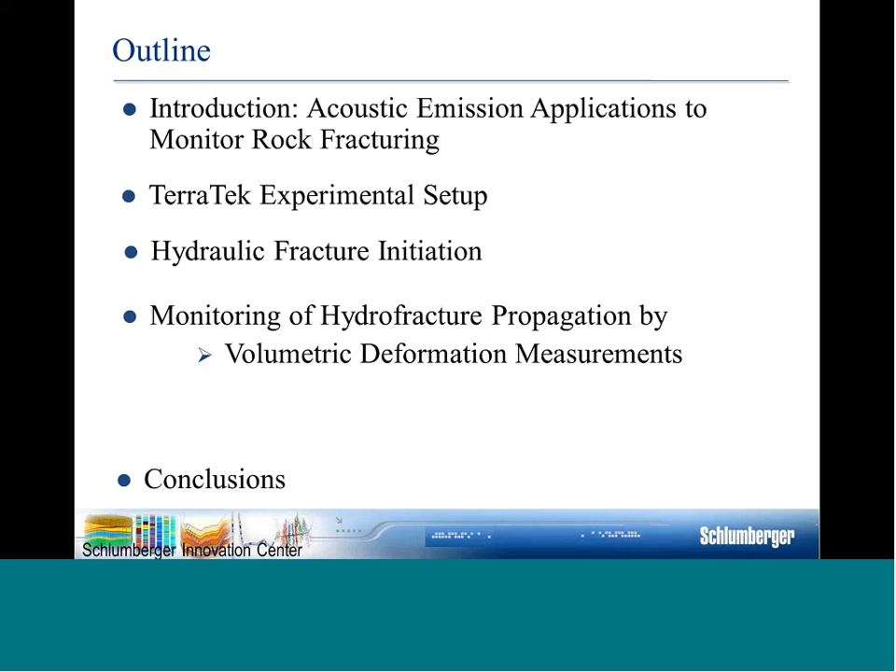As John already mentioned, you can probably guess from my accent that originally I'm from Russia. For more than 20 years I worked at the Academy of Science of Russia in the Laboratory of Physics of Fracture. I got my PhD diploma in Russia, but after the collapse of the Soviet Union, I moved to the U.S. Geological Survey, where I worked about 5 years. Then I was invited to work in Germany, at the German Research Center, where I had a permanent position with everything set up for pure scientific research, until 3 years ago, when Roberto Suarez Rivera and Sidney Green convinced me to change my pure academic research for the challenging research at TerraTek, Schlumberger. I relocated to Utah about 3 years ago.

Throughout my whole career I always used acoustic emission. As John mentioned, for more than 35 years I've used acoustic emission to register cracking at different scales, starting from micro scale cracking of grains, up to studying the preparation of earthquakes in the deepest underground gold mines in South Africa. In all this research I always use the acoustic emission technique to register cracking, because it's a really powerful tool to investigate what is going on inside a stressed body.

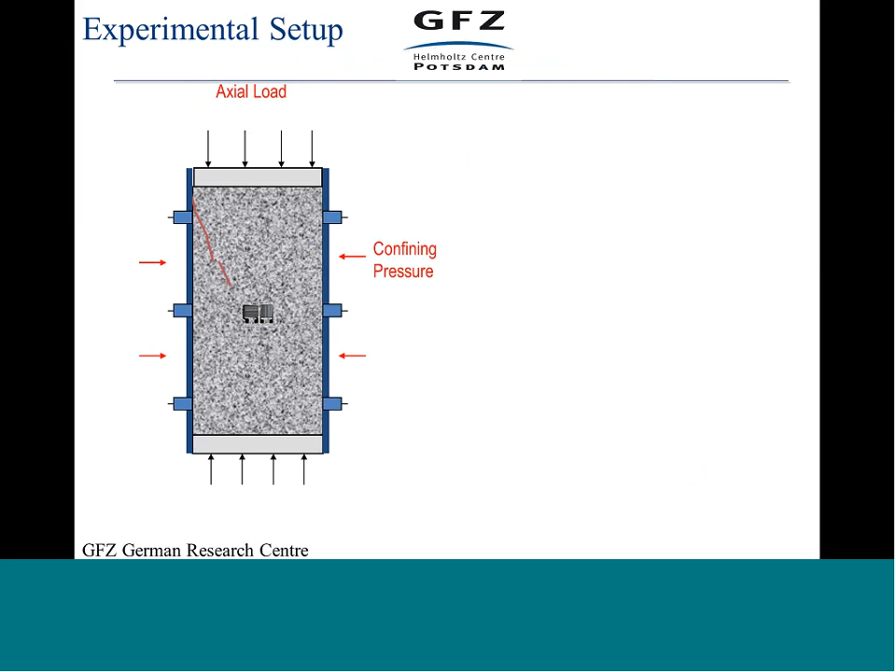Today I will show you an overview of acoustic emission applications. First I'm going to start with the application of acoustic emission for researching fracturing of rock that I performed in Germany. I'd like to mention this setup because now, together with my colleague Eric Edelman, we started very similar research at TerraTek. In Germany, I investigated cylindrical samples of 50 millimeters diameter.

During fracturing of the rock, acoustic emission sensors register elastic waves, and using these elastic waves we triangulate and localize cracking. But for accurate localization, it's necessary to know the velocity in the rock as precisely as possible. Therefore we use a set of sensors for periodically sending pulses through the rock, to measure time-dependent and stress-dependent elastic velocity during the process of fracture.

As a result of this precise velocity measurement, it was possible in my research in Germany to achieve accuracy of acoustic emission hypocenter localization of about plus or minus 2 millimeters.

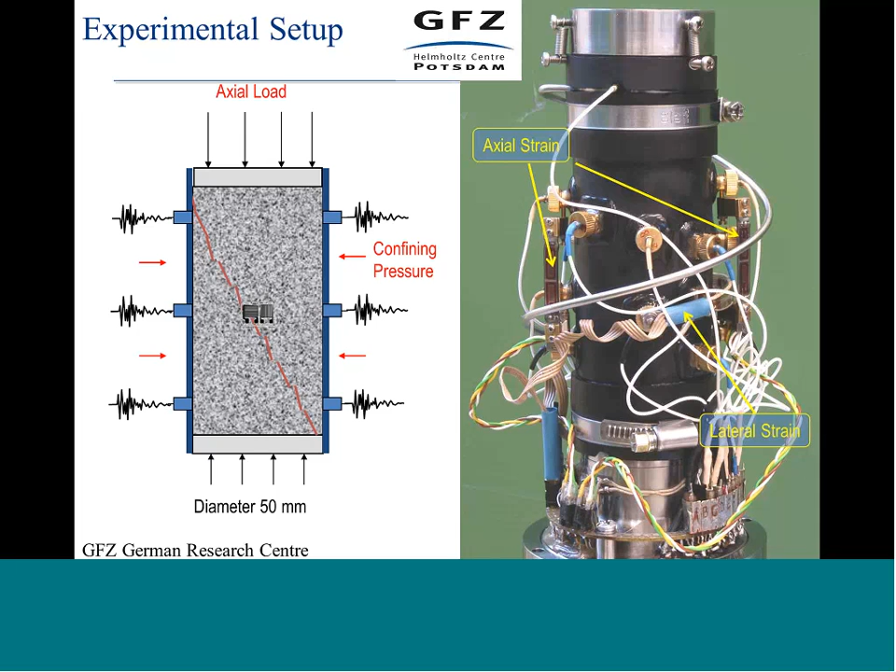The next slide shows our technique for separation of acoustic emission events.

This technique is really very simple. Right now at TerraTek, we initiated work using full moment tensor analysis for more detailed analysis of the source function. But I will show you that even this simplified technique can give us some information about the type of cracking we register during the process of fracture.

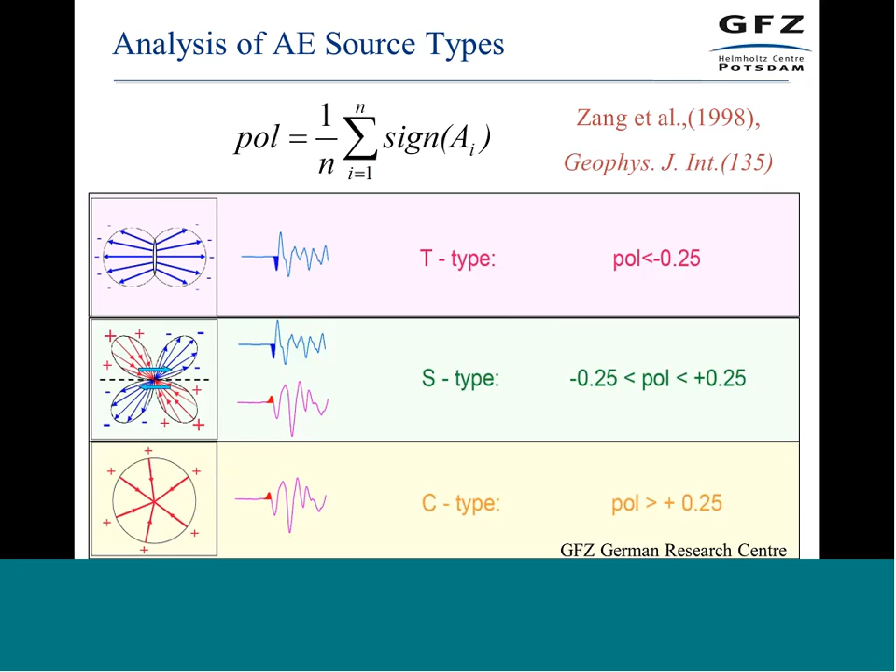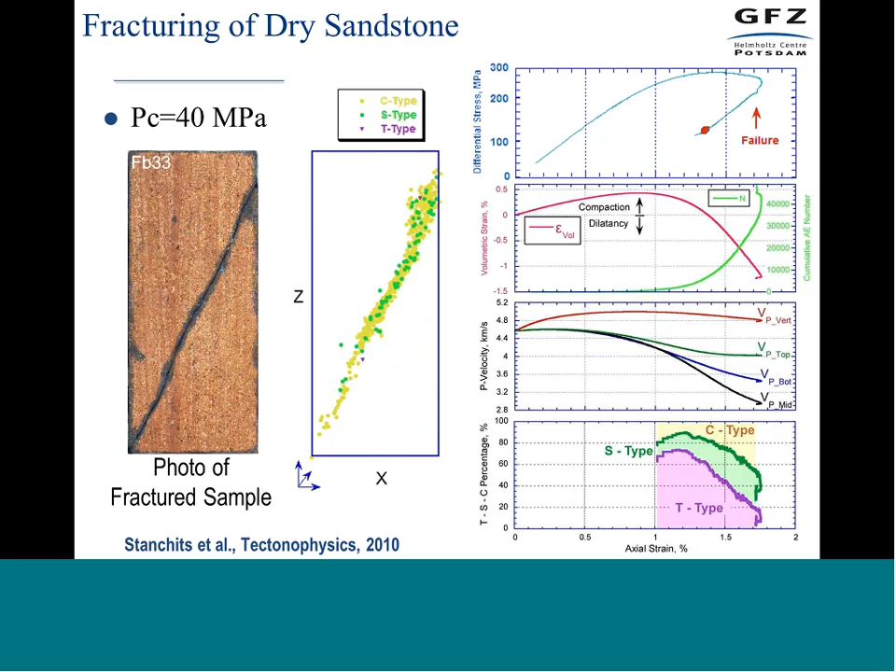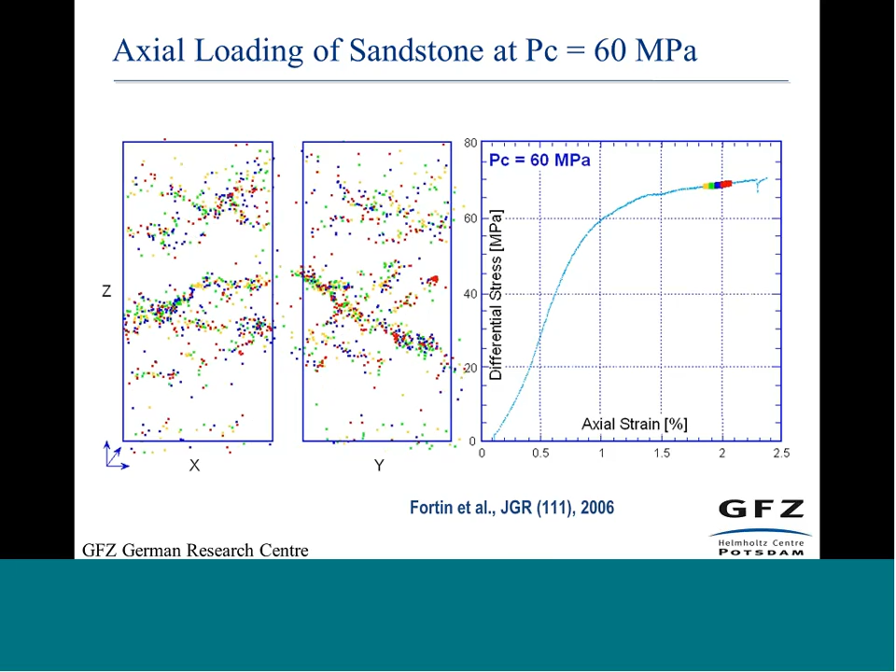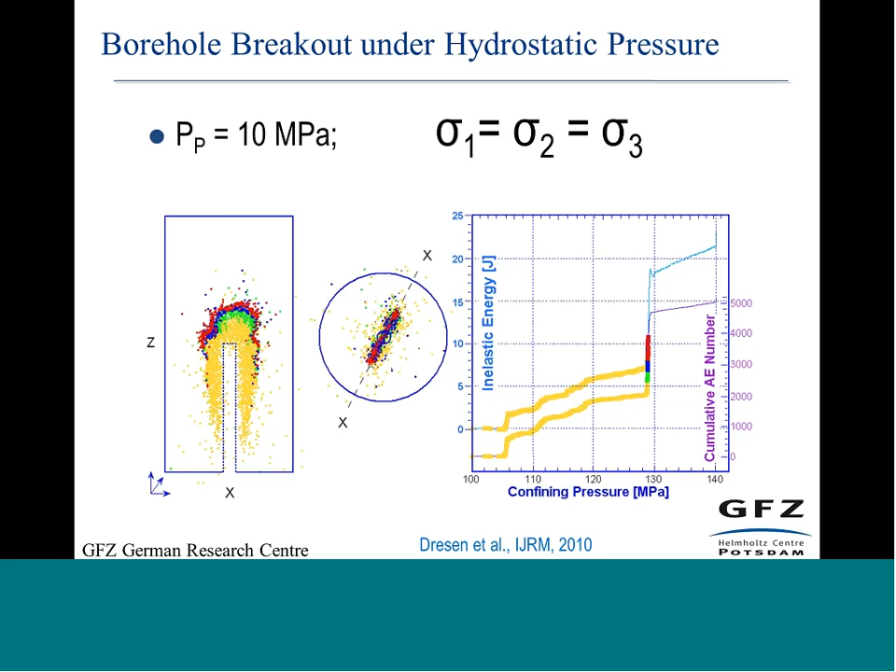There is a possibility to apply true triaxial stress up to a few thousand psi in different directions, and it's also possible to inject fluid and investigate hydraulic fracture.

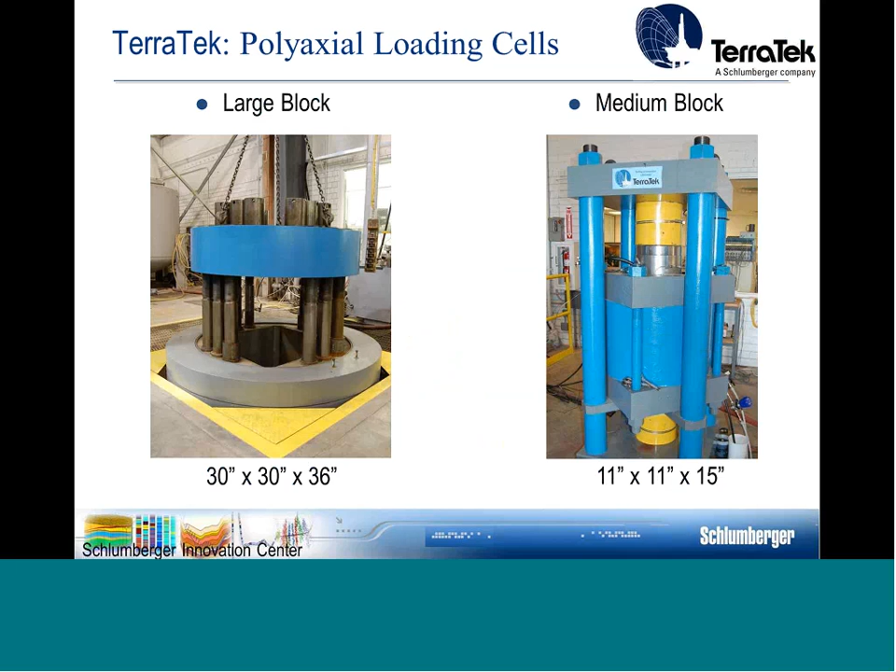In our research, we investigated three kinds of rocks. First, I will show you results obtained with homogeneous rock, without any planes of weakness -- it was a sandstone sample.

Then we performed a series of research together with Jeff Land, where we cut a sandstone sample into two pieces, glued them together at the periphery, and investigated propagation of hydraulic fracture through these artificially created discontinuities.

To make this photo, we wiped the surface of the rock with mineral spirit, which evaporates very quickly from flat surfaces but remains stuck inside thin cracks. You can see the complicated structure of the shale before the beginning of the test.

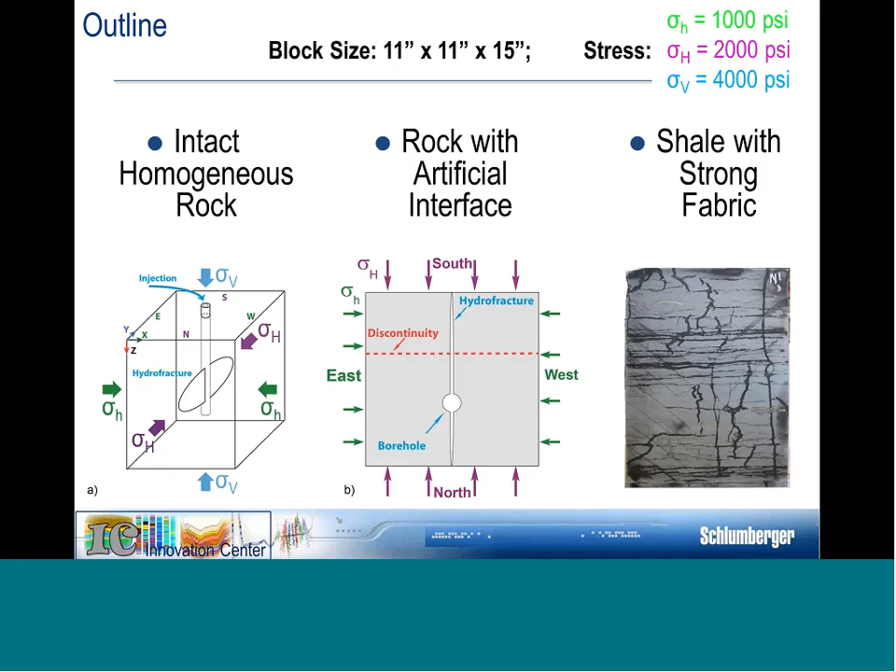We performed modeling of artificial discontinuity in order to model natural planes of weakness and discontinuities in the shale. We investigated hydraulic fracture propagation with different fluid viscosities and injection rates, to investigate conditions for successful hydraulic fracturing. First, I will briefly show you our experimental setup.

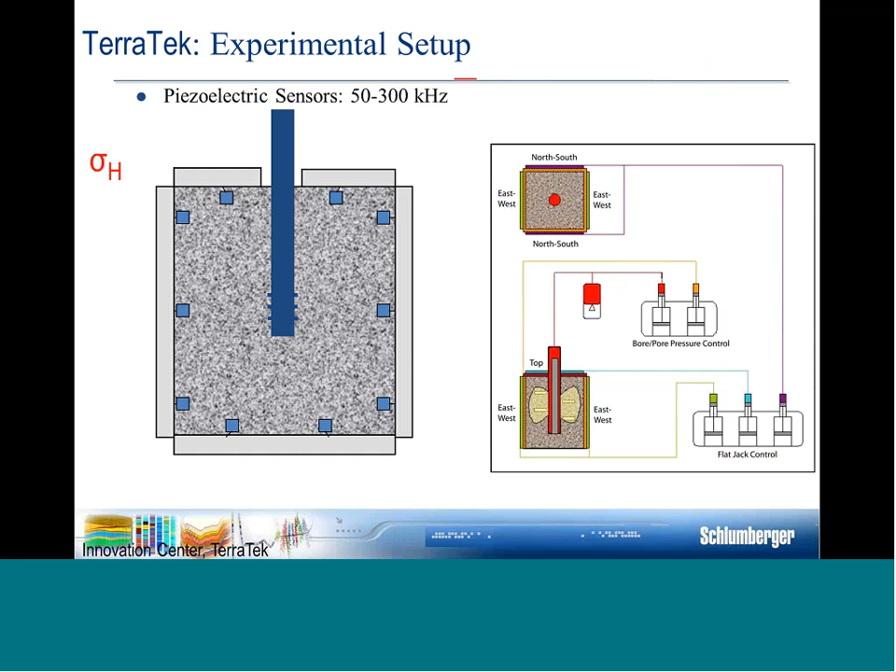Our acoustic emission sensors were either embedded in the rock or embedded in the loading plates. Now we have a technique with sensors embedded in the plates, it became much easier to install rock and investigate hydraulic fracture. And then we inject fluid inside the borehole, and acoustic emission sensors allow us to localize

coordinates using our data acquisition system. And the next slide shows results obtained on our homogeneous sandstone blocks. That's just for reference, I show you that.

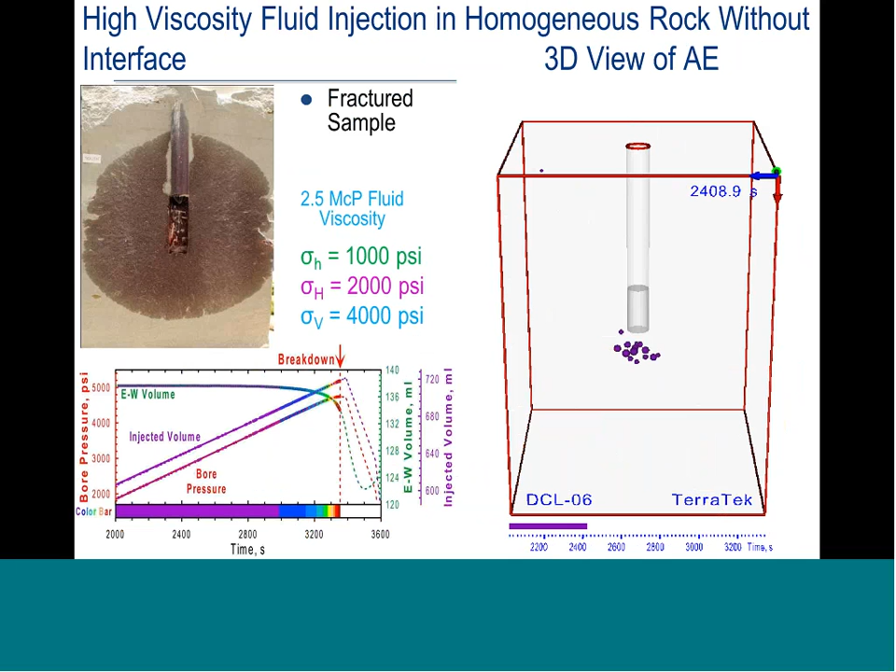hydraulic fracturing at different viscosities. In addition to just plotting dots, we calculated density of acoustic emission events. In this case, I used a sliding cube inside our sample block with 5 millimeter size, and I calculated density of acoustic emission events inside this cube.

This density plot shows very nice comparison with the shape of the actual hydraulic fracture, very close to pancake shape. You can see also that hydraulic fracture continued propagation toward the boundary even after withdrawing fluids from the borehole, because in this case we were withdrawing not very fast, and the hydraulic fracture was close to the boundary. You can see that injected volume goes down, but hydraulic fracture still propagates over the surface. Therefore we learned how we can arrest the fracture in this kind of test, especially in order to investigate in detail this arrested fracture behavior.

And the next slide shows just a comparison of different parameters plotted versus bore pressure.

On the lower plot, red dots show localized acoustic emission events plotted versus bore pressure. We applied some criteria. It's very important for practical application of microseismic observations or acoustic emission to identify the moment of hydraulic fracture initiation, and we applied statistical criteria described in our ARMA paper using correlation coefficient analysis to pick up that moment.

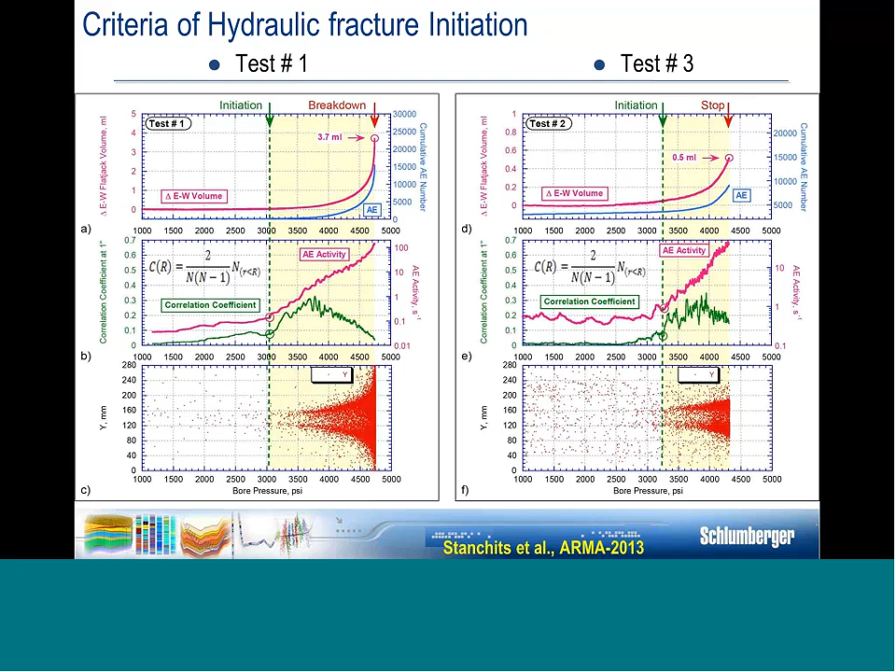In real-time mode we can monitor initiation of hydraulic fracture using acoustic emission, shown as the blue curve on the upper plot, and volumetric deformation measurements. This allows us to interrupt injection in test number 3 and withdraw fluid very fast in order to arrest the fracture and investigate its structure.

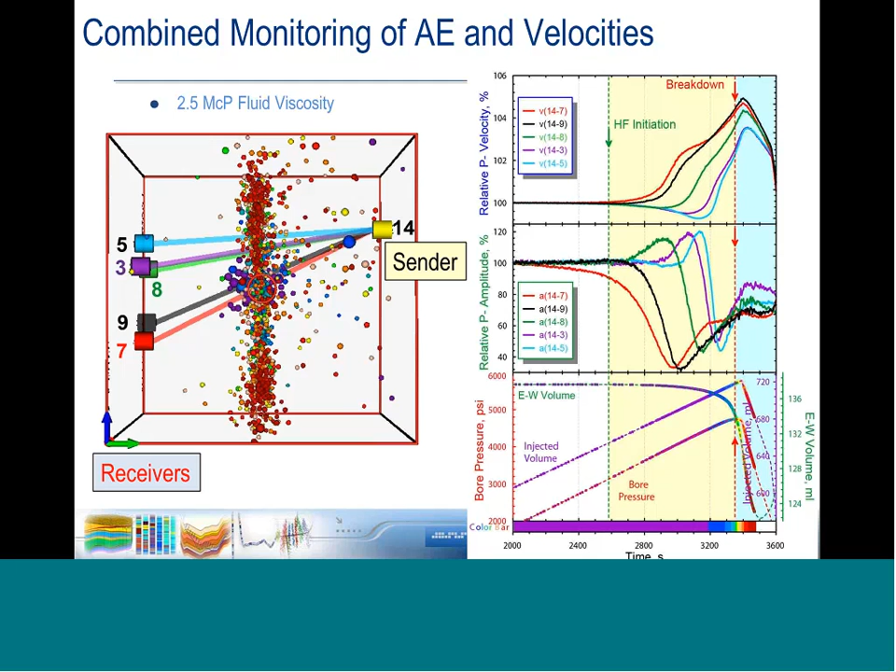To show comparison of velocity measurements with acoustic emission, I made an animation highlighting each ultrasonic transmission trace at the moment we observed amplitude drop to 80% level. I selected this just for comparison purposes, but you can see a pretty good correlation between the position of the ultrasonic transmission trace and propagation of the acoustic emission cloud.

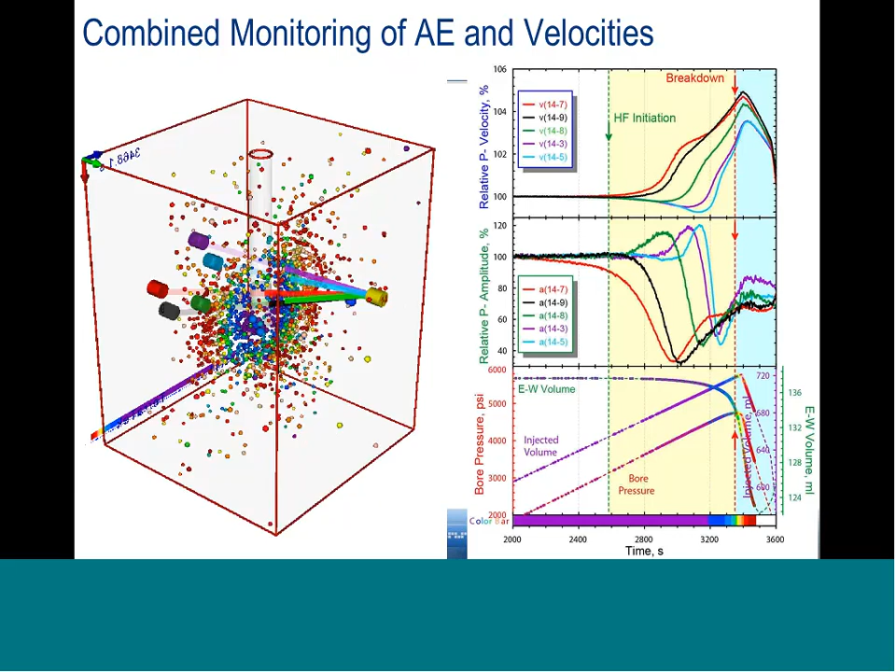These acoustic emission and velocity measurement results were obtained completely independently, even though we used the same sensors. You can see how amplitude and velocity change on certain traces with some delay during hydraulic fracture propagation. We think this gives completely independent confirmation that the fracture process was initiated significantly earlier than the peak of bore pressure.

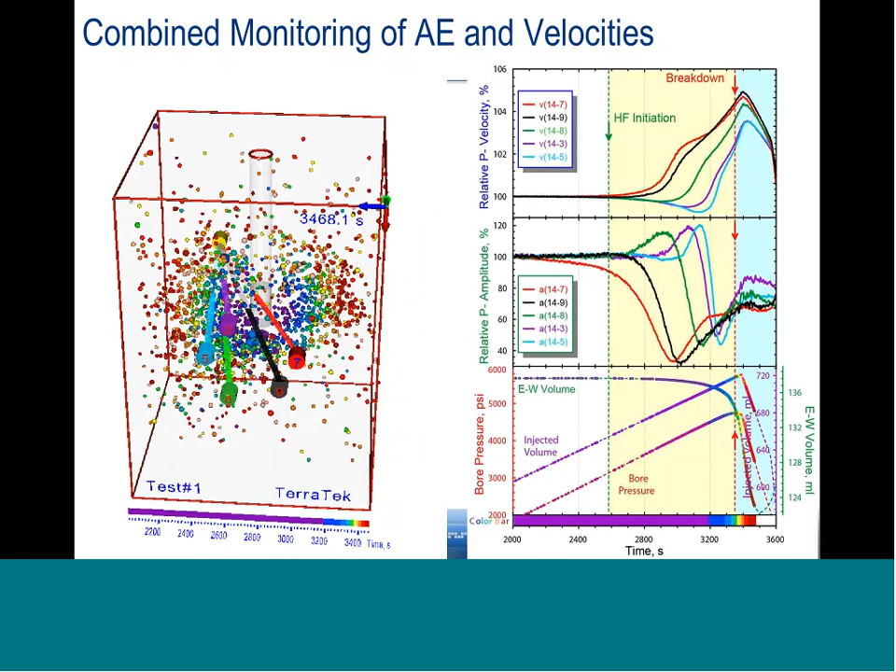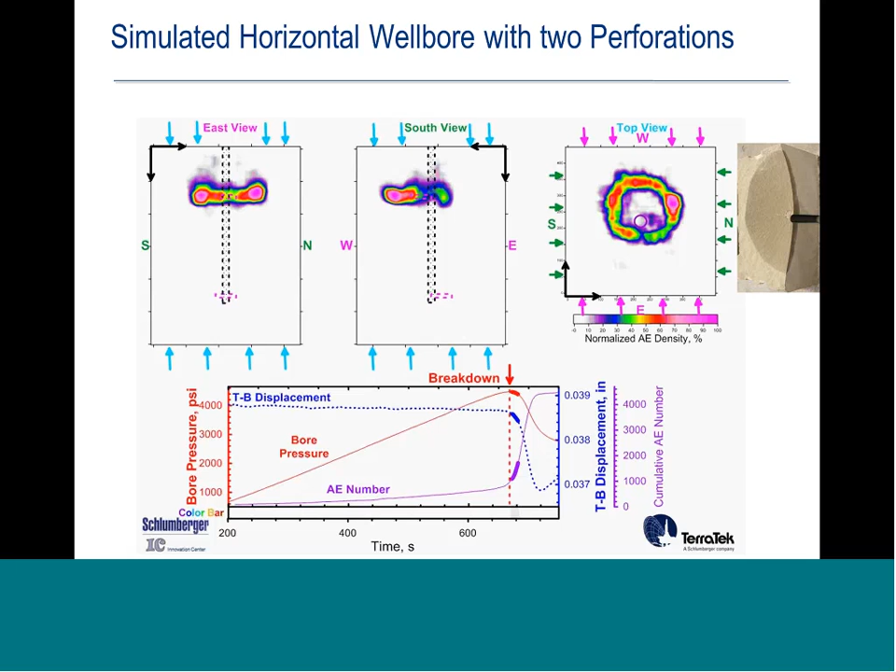We performed different kinds of research in our triaxial cells, and I decided to demonstrate one involving horizontal fracture propagation. This research was performed when we applied the smallest stress in the vertical direction, modeling a horizontal completion.

And you can see a nice shape of hydraulic fracture, very close to the photo of a fractured sample presented on the right part of the slide. You can see how hydraulic fracture propagates, and acoustic emission can help us not just identify the initiation of hydraulic fracture, but also estimate the speed of this cloud propagation and the size and extent and whole dynamic of hydraulic fracture propagation in both horizontal and vertical completion.

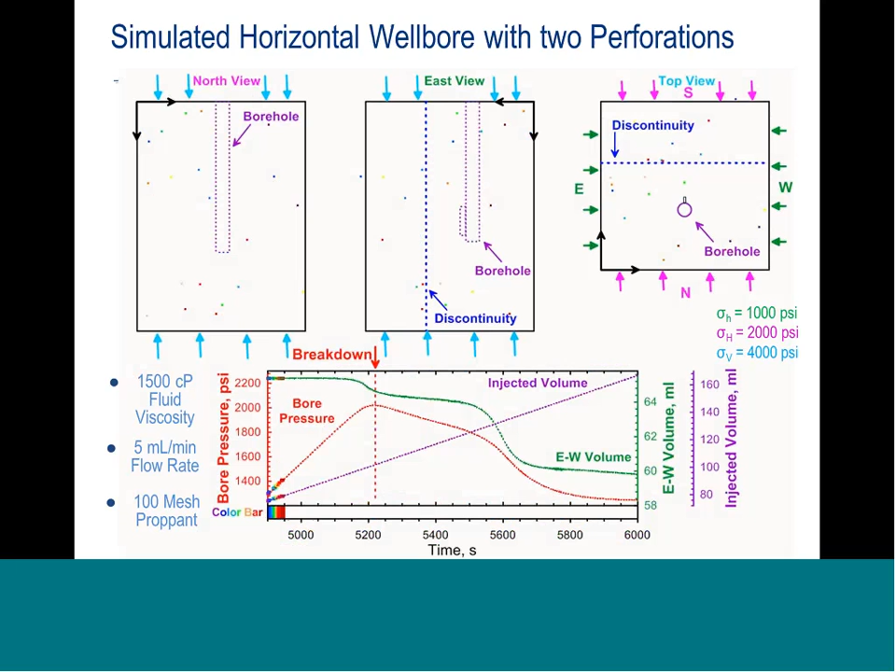As I mentioned before, we performed tests with the artificially created plane of weakness. Actually, it was a block cut into pieces and then glued together at the periphery. From the animation presented in the middle part of the slide, you can see that hydraulic fracture at first propagated towards discontinuity, and then there was spreading of hydraulic fracture up and down along discontinuity, and also east and west along discontinuity.

You can see this process was really delayed at the discontinuity, and later hydraulic fracture propagated through the whole block. In that experiment we registered a little bit unusual response of bore pressure and also E-W volume, where we observed two steps in the E-W volume measurements. Acoustic emission is the only technique that allowed us to identify what was the reason of this first drop and what was the reason of the second drop.

You can see that at the beginning, at the moment of first drop, close to the breakdown, we have hydraulic fracture reaching the interfaces. Then there was a pretty long process, about 10 minutes, of propagation of fluid along the interface, up and down. Only later, with some delay, we observed the second drop of east-west volume measured by flat jack, and propagation of hydraulic fracture through the rock and from the borehole to the north surface of the block.

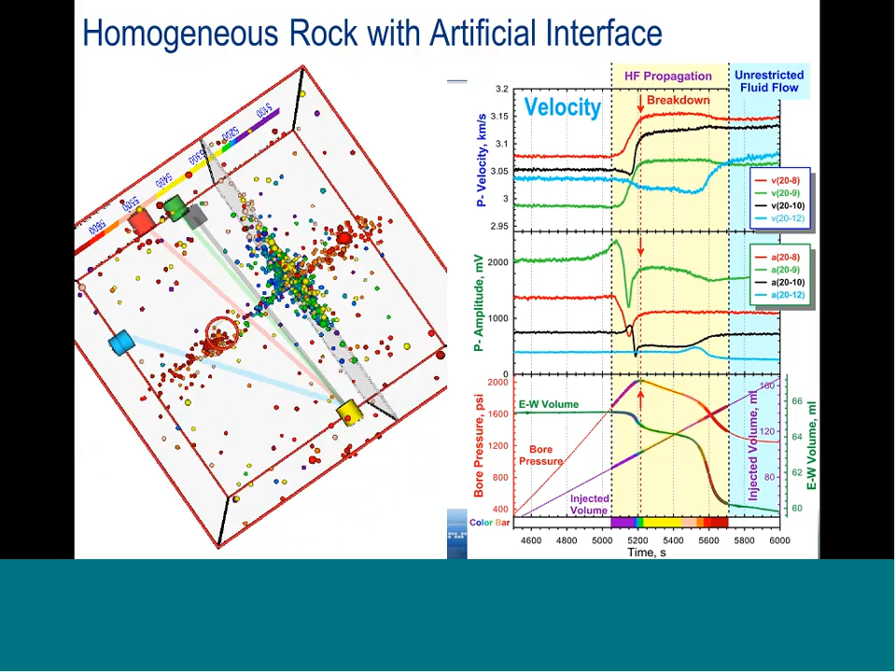In this series of research, we have found that in case of high viscosity fluid, hydraulic fracture most likely propagates through the interfaces without any problem. But in case of small viscosity fluid or small injection rate, very often we have this process of spreading of acoustic emission cloud, indicating propagation of fluid along interfaces. That conclusion, based on our sandstone homogeneous block research, helps us for interpretation of results obtained on the shale.

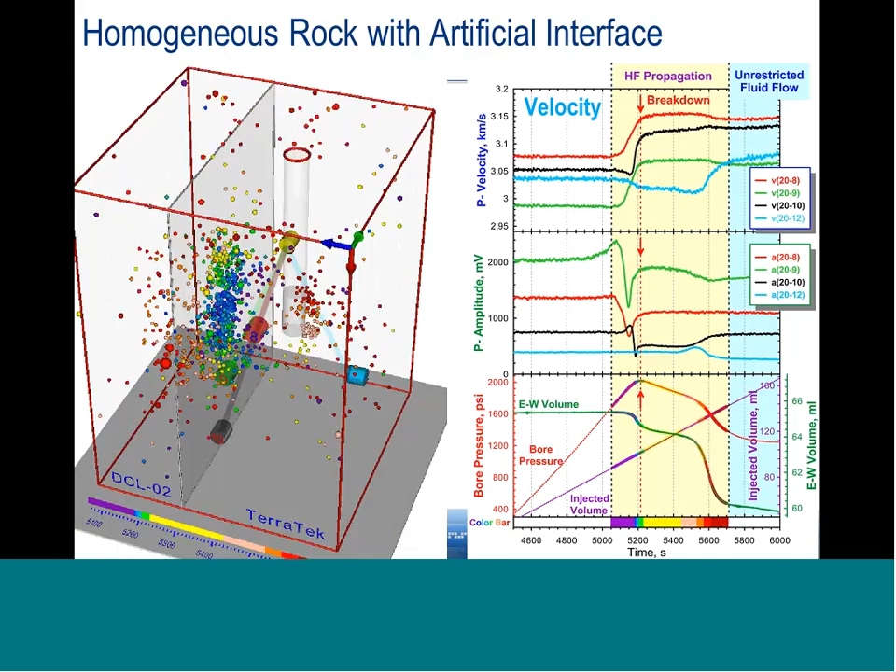Let's now look at the shale results. This was a shale block of 11 by 11 by 15 inches, the same size, with the same geometry and almost the same stress as before, and with very high viscosity fluid.

You can see that also in this case we observed symmetrical propagation of hydraulic fracture from both sides of the borehole, but in comparison with the sandstone sample, our acoustic emission cloud was significantly shifted below this open hole section region. We have an assumption that it's related to the containment because of the bedding planes. Therefore the fracture was propagating in the lower part of the block, and there was almost no fracture in the upper part of the block.

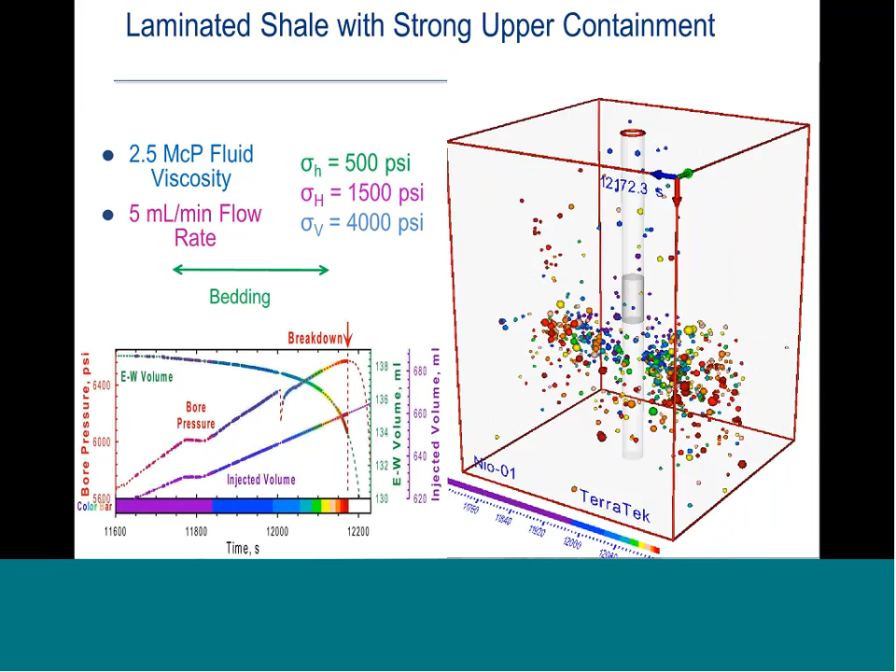But in the shale with high viscosity fluid, we observed initiation of hydraulic fracture significantly earlier than breakdown, something like 20 minutes earlier, and with significantly lower pressure. Propagation of hydraulic fracture was really similar to the propagation in homogeneous sandstone blocks. In case of using water, we have found completely different results.

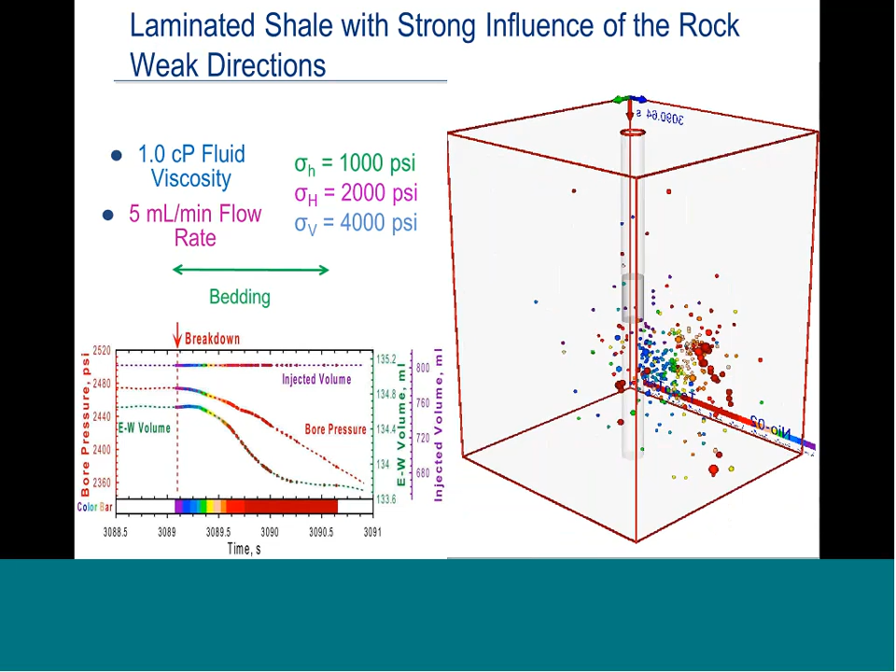The next slide shows just a comparison of two cases. I hope I can activate both of them, and you can see the comparison. It was the same material, the same shale. Two blocks were obtained just next to each other, but you can see a completely different pattern of hydraulic fracture. We injected fluid with the same injection rate. It was the same stress applied to the block. The only difference is viscosity.

In case of high viscosity, it was 2.5 million centipoise, and water is significantly lower viscosity. And we observed a completely different process and different dynamics of hydraulic fracture propagation.

In all our other tests performed with the shale, we always found that in case of high viscosity fluid, we observed slower propagation of hydraulic fracture with wider opening, and there is a tendency to cross some interfaces and bedding planes in case of high viscosity fluid. But with the high viscosity fluid, it was necessary to pump bore fluid up to very high bore pressure, and therefore it's a completely different process.

In case of water injection, the bore pressure at which we observed breakdown was a few times lower, but the fracture was also more narrow and propagating significantly faster than in case of high viscosity fluid injection. Therefore, this series of research demonstrated the strong influence of fluid viscosity and injection rate on the dynamics of hydraulic fracture propagation, and it's necessary to take this into account when planning any hydrofracture work in the field.

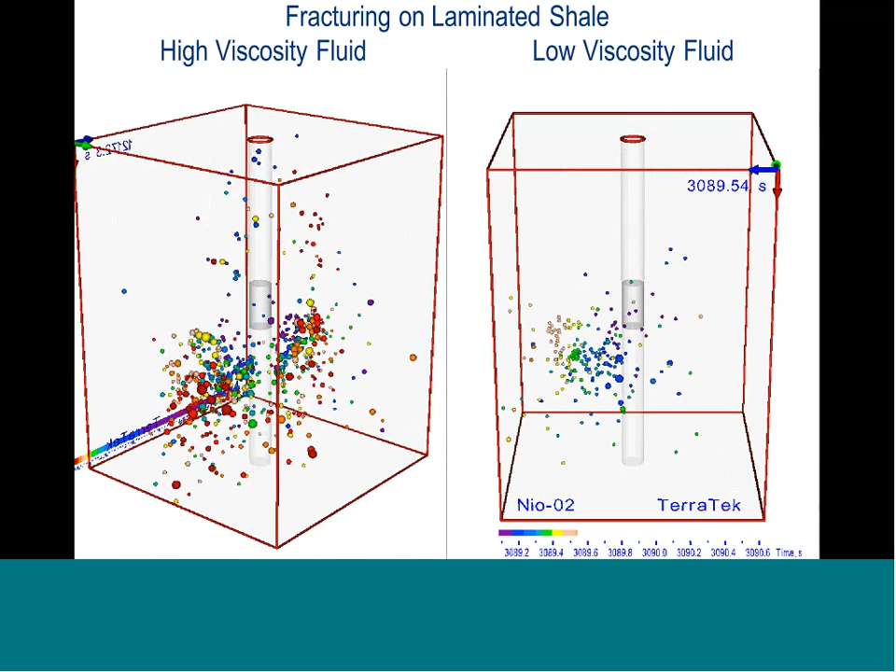And just as a conclusion, I can tell you that during our series of research, we found strong correlation between independently measured volumetric deformation and the distribution of acoustic emission events. Also, acoustic emission, ultrasonic transmission, and volumetric measurements indicate initiation of the fracture process with high viscosity fluid much earlier than maximum bore pressure. This was confirmed by independent measurement.

Acoustic emission fracture mapping correlates well with the actual fracture geometry from post-test analysis and with the SEM analysis of fractured rock. We have investigated the effect of interfaces on fracture propagation, as I described in my presentation. Acoustic emission analysis shows us that fracture geometry in shale with strong fabric depends strongly on fluid viscosity and rock fabric.

And it's definitely necessary to always take this into account during planning of a hydraulic fracture job.

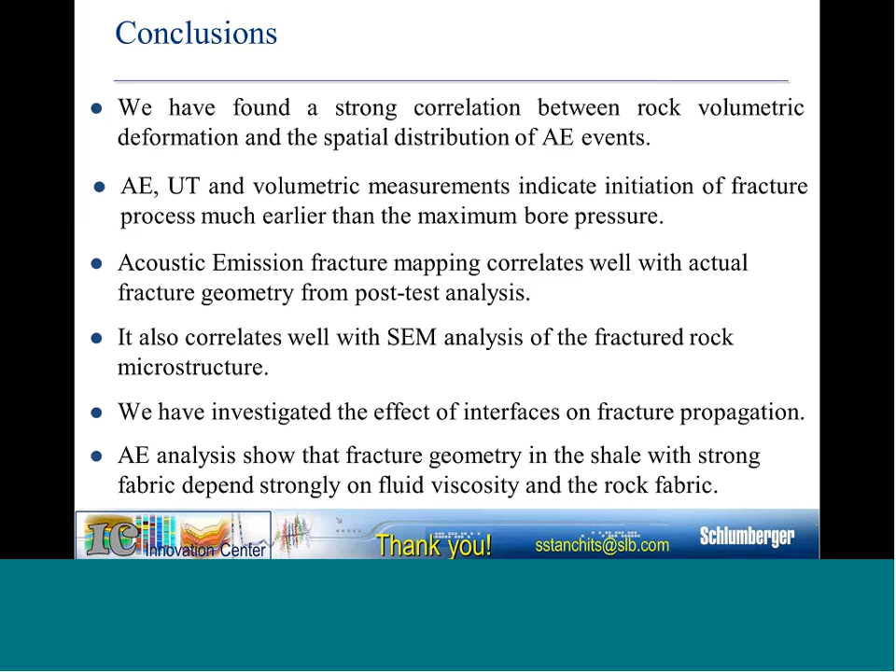In the end, I would like to thank my colleagues, because we performed this series of research together with TerraTek and Innovation Center colleagues, some of whom are here during this presentation. I really thank the whole group of our researchers, and now I'm ready to answer your questions. Thank you for your attention.

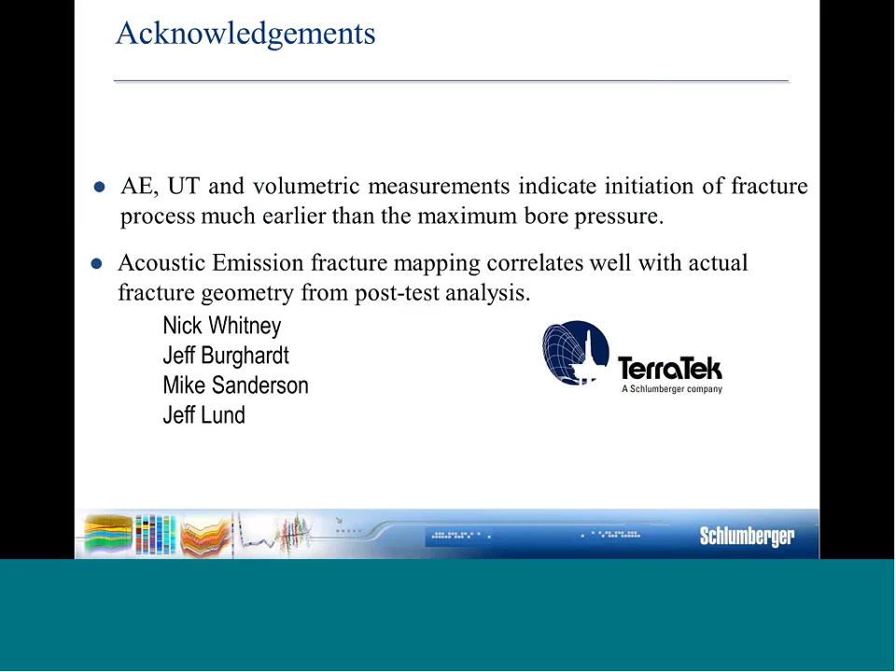Any questions? One of the slides showed the waterfront moving from bottom to top. Yeah, I can put this slide up very quickly.

During the process of propagation, we specifically calculated that when we applied 5 MPa pore pressure at the bottom, there was a sharp gradient of pore pressure distribution. But later, during propagation, the pressure profile became smoother and smoother. Therefore, at the end, during propagation of water through the second part of the sample, there was not enough additional pressure from the waterfront to induce fracture.

We found in our research that to have induced acoustic emission activity, two conditions are necessary. First, the sample, or a local place in the sample, should be very close to failure. Second, it's necessary to have pore pressure high enough to induce fracture in that particular place. If we don't have these conditions in the upper part of the sample, there will be no induced acoustic emission activity, because it's really necessary for the sample to be very close to failure before induced acoustic emission can be registered.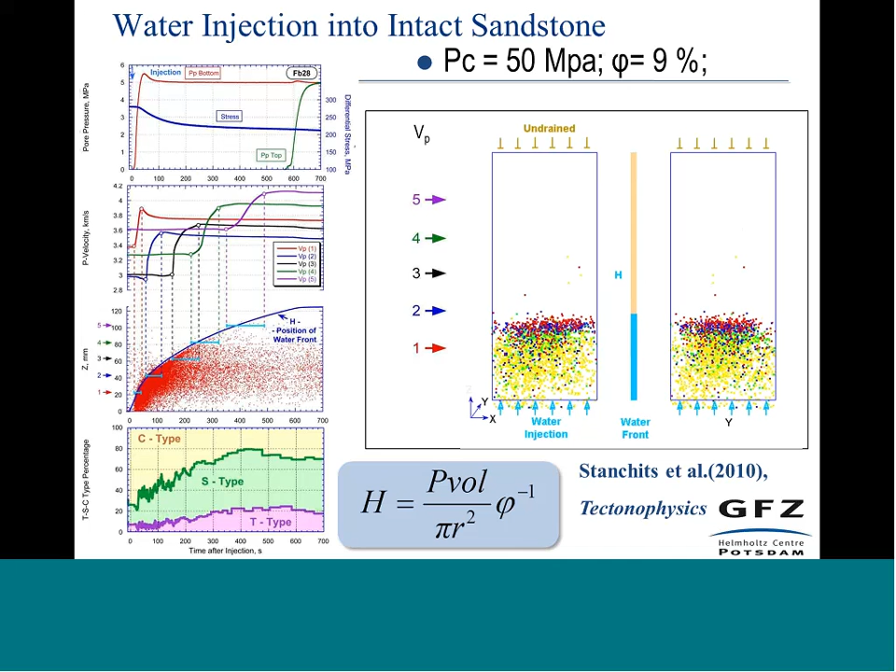I don't know a lot about fracking, but in a lot of instances they use proppant or props that keep the cracks open. Did you use that in any of these experiments?

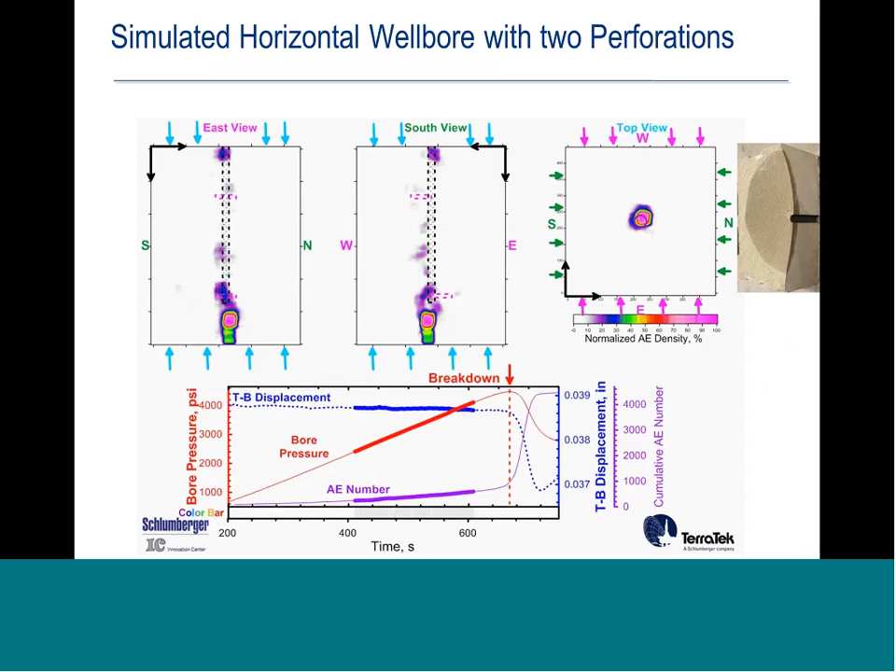Yes, we used proppant, and you can probably see it on this slide. No, not on this one, but in this test we used 100 mesh proppant, and we found that to have proppant delivery, it's necessary to have a wide enough opening. We performed a series of tests with proppant.

In this particular test, we found no presence of proppant on the outside of the block. All the proppant remained in the borehole, because the opening of the hydraulic fracture with the 1,500 centipoise fluid was not wide enough to deliver proppant.

When we performed a similar test with high viscosity fluid, as far as I remember, Jeff observed proppant on the surface under the same conditions - same injection rate, same stress conditions - but with the high viscosity fluid we had proppant delivery. We have evidence that proppant reached the surface and was also collected in buckets after the test.

In this particular test with the smaller viscosity fluid, there was no proppant delivery at all. Therefore, for a frac job in the field, it's always necessary to consider that to successfully deliver proppant to a certain place, the fracture opening needs to be wide enough. We found that only high viscosity fluid combined with high injection rate gives a wide enough opening.

In this case, we have many examples of successful proppant delivery, also in shale. But in many cases, shale with plenty of planes of weakness makes it very difficult to deliver proppant, because shearing can occur along those planes of weakness, resulting in insufficient opening so proppant is not delivered. Therefore, it's really important to know what opening of the hydraulic fracture we can estimate.

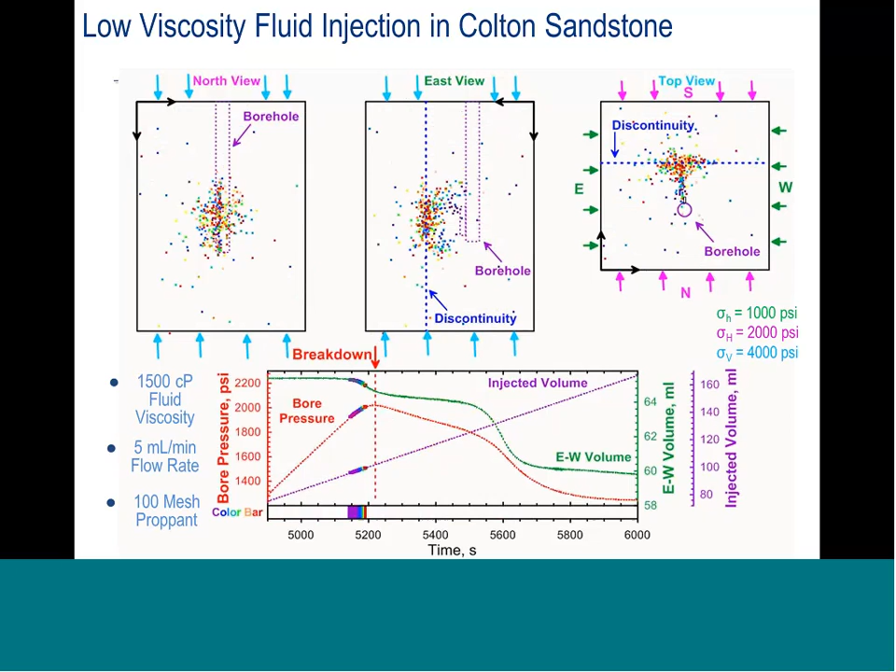So after you've initiated the fracture and you stop pumping, you still have emissions, due to the rock reorganizing itself. And what can you infer from that?

Just like in this example, or maybe this will be even better to show, let me stop the animation at the moment of beginning of fluid withdrawing. For example, now I stopped at the moment of fluid withdrawing. Definitely we are pumping back, but all the dynamics of hydraulic fracture propagation indicate that the fracture is really very close to the surface, and we have a lot of stored energy in this fluid inside the borehole.

And if I continue the animation, you see we still have a process of fracture propagation even after withdrawing. Therefore, based on this experiment, we have learned that in order to arrest the fracture, it's necessary to withdraw fluid really very fast. In another test, which I call test number 3, when we really arrested the fracture inside the block, we withdrew fluid at a significantly faster withdrawing rate, because that's the only way to prevent fracture propagation toward the boundary, by removing energy fast enough. And we demonstrated that we can do it successfully.

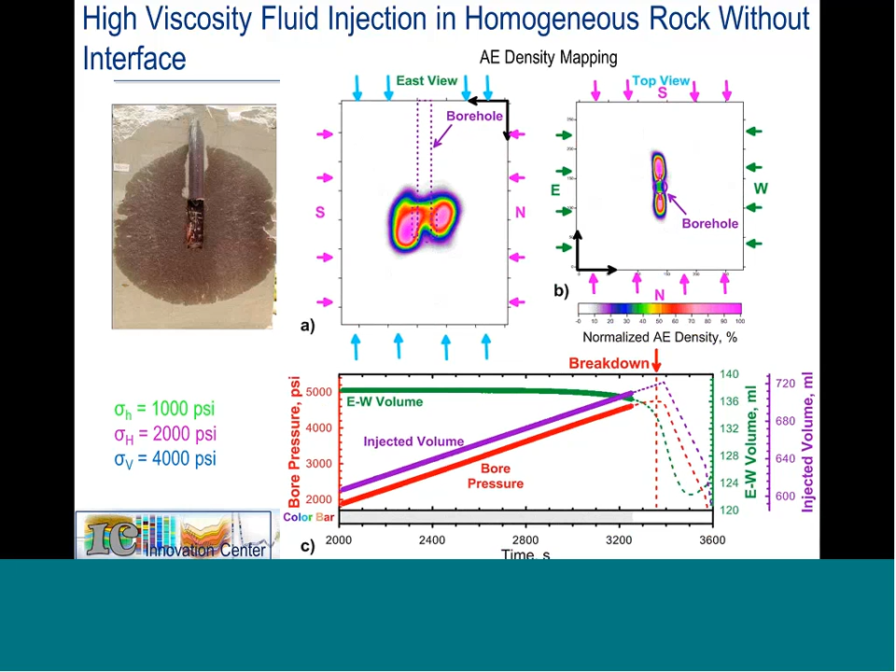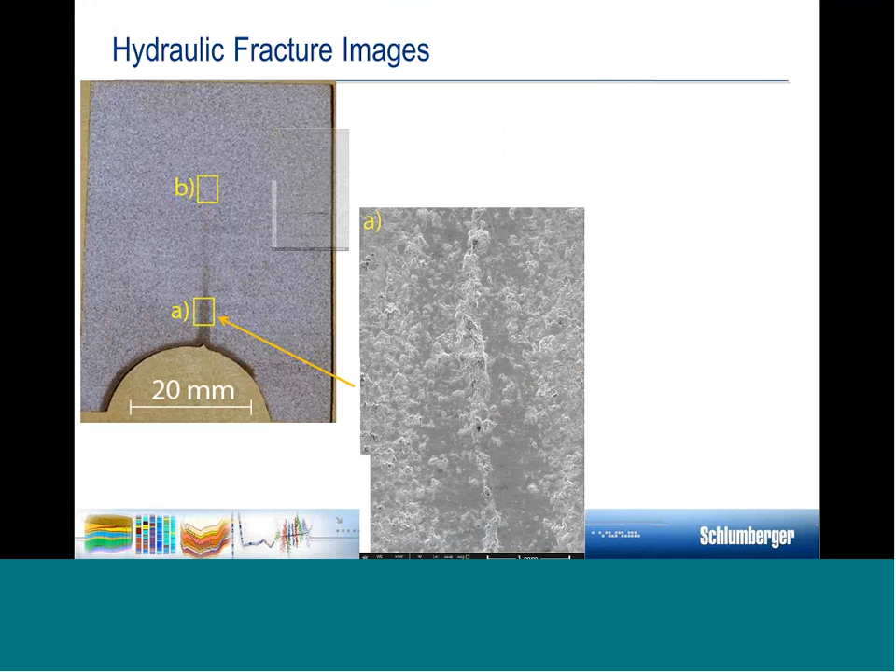Of course, in order to do it, it's necessary to reliably identify that we have a fracture, and then take action and remove fluid very, very quickly. We performed a few tests, pretty successfully, and we know, as we demonstrated directly on the thin sections, that the fracture was arrested. I especially made thin sections at distances higher than B. There was no indication of fracture at all, just an intact sandstone block without any presence of fracture. Therefore, we know how to arrest a fracture, and acoustic emission helps identify it at the moment of initiation.

How did you decide what to do at the bottom of the wellbore, where you did your perforation? How did you decide what geometry to use, and how does that compare to what's done in the field with casing and perforation?

We performed, actually, as I mentioned, I've been at TerraTek for 3 years, and during these 3 years I know we perform different kinds of perforations. One of the simplest is sandblasting - we perform sandblasting at a certain distance and can create sharp channels. We also had helical perforation, and an abrasive jetting tool that performs slots.

We found that the shape of perforation really has a lot of influence on initiation of the hydraulic fracture. We also performed many tests with just a small scratch on the surface to create very small stress concentration. We always observed that with very small stress concentration on the surface, we have higher breakdown pressure, higher initiation pressure.

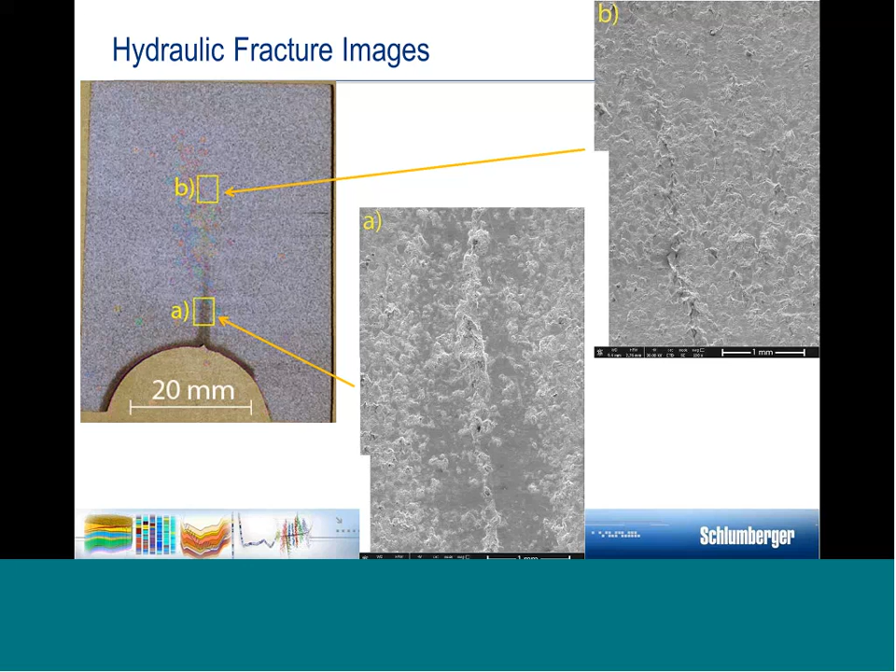We're just unable to do that in the laboratory, and also the sample size is maximum only 1 meter, while in the field of course it's much longer. But we are still trying to do this modeling, first investigating the processes at a small distance from the borehole, using exactly the same diameter as in the field. In order to make the scaling, we use this comparison with different dimensionless viscosities.